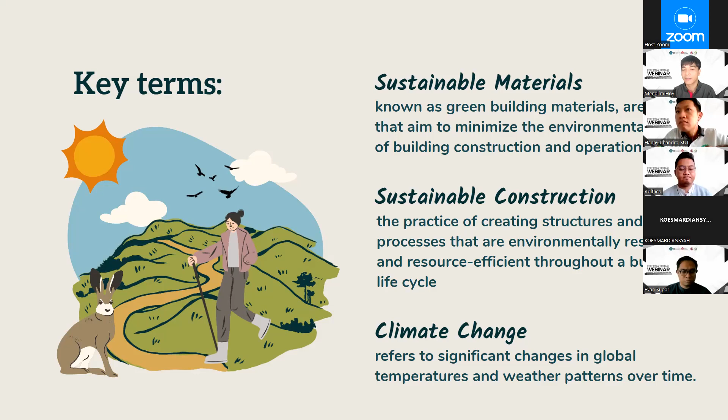So we can go to climate change. What is climate change? Everybody has heard this term very often because it's a global concern.

It can have a lot of definitions if you just Google it, but I prefer a short, simple one: the significant change in global temperature and weather pattern over time, especially in Thailand.

I don't know about your country, but in Thailand we used to have cold weather and hot weather. Right now in Thailand we only have 3 seasons: hot, hotter, and very hot. So the temperature increases every year.

Mr. Hanny stays here, he knows the situation is very hot. The weather changes over time — it can be flooding, it can be storms or whatever, and that is the most influential problem we have to deal with every year.

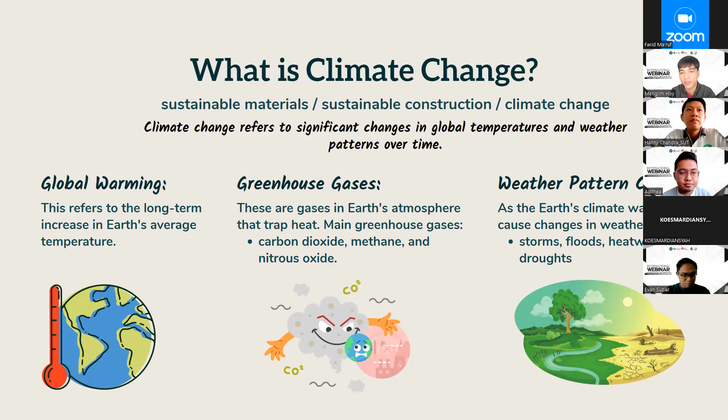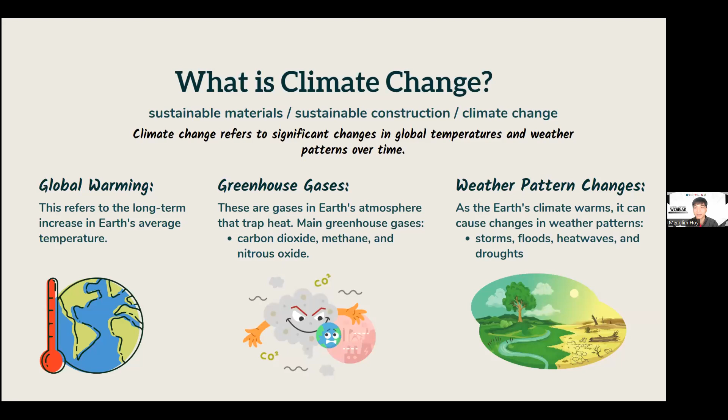Before, it was like every year, for example from January to April, it's hot season with no rain, but sometimes it changes — even in hot weather there can be huge rain or a storm. But in the rainy season, sometimes the rain doesn't come, so it becomes drought, which is very hard for farmers. This is the pattern influenced by climate change.

And another one is sea level rise, which might not affect our country much, but in Europe, for countries that have polar ice, when it melts it can increase the sea level, and this can cause flooding.

And the last concern is about the ecosystem or biodiversity. You can see that a lot of species have gone, and this is related to humans as well. And if the farmer cannot...

All right, so this is all I can say about climate change, which is influenced by human activity. Actually, it can be said that naturally it can happen, but I think humans are the key driver to make it go very fast.

Let's take an example of a case study from climate change, the 5 items I just mentioned above. We have a lot, but I just take some of the obvious examples of the influence from climate change.

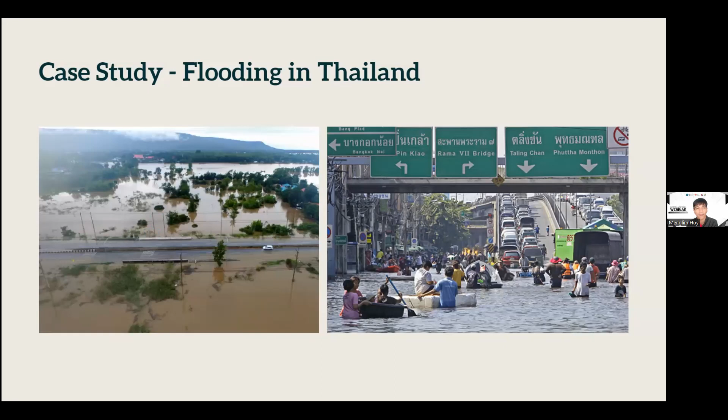And a similar situation is also not only in Thailand, but it also happens in the Philippines. In the Philippines, my friend who just graduated from our Suranaree University, I have some time to talk to them, they are in the Philippines. The problem is quite similar because of the geography of the country, and I think in most countries in Asia, they also experience flooding.

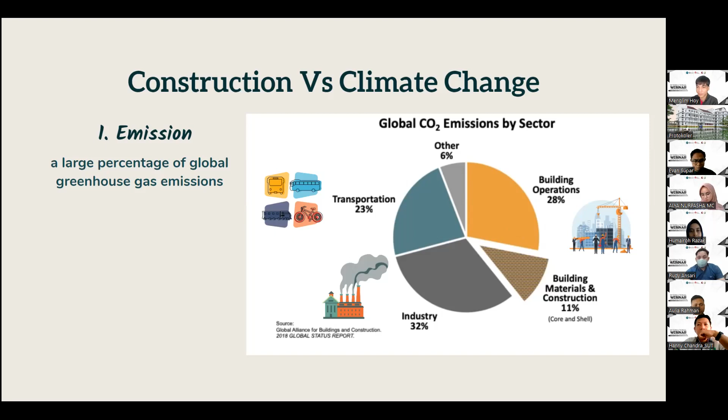But actually, if you combine construction, building operation, and building and construction materials, it's also a main contributor—the big three in producing greenhouse gas emissions. So construction needs to be concerned about the most as well. That is the topic we're going to talk about today.

Number two is resource consumption. Most construction, especially for high-rise buildings or for urban planning development and house development, you can see consumes a lot of natural material—natural material for construction, even for high-rise buildings, road infrastructure, pavement, highways. We consume a lot of natural raw material.

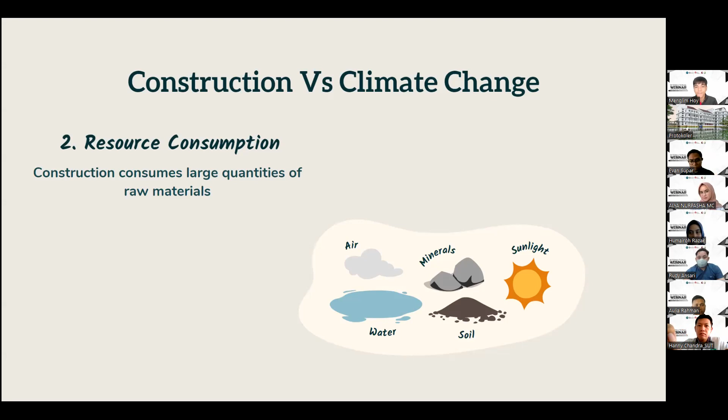And number three is, along with new development of infrastructure, those buildings or infrastructure which is covered will eventually be demolished. Demolish means we have to demolish it first before we construct a new building, because the building might have some age. It's like people—when it reaches its design life, we have to demolish it and then rebuild a new one.

So you can see that the process of demolishing generates greenhouse gas emission activity, and the waste becomes a problem. You have to deal with this waste, not to deposit it in the landfill. Actually, my major now, my research field, I'm working a lot with this waste material in order to convert and recycle it into construction material again.

At the same time, energy use—we need a lot of heating, cooling, and electricity. In Thailand, for example, during hot weather, we need a lot of electricity to cool down the building. So that is a main problem as well for Thailand.

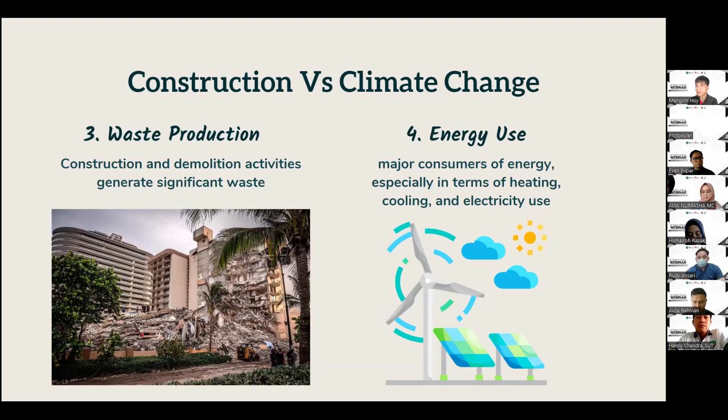And electricity now, the price of electricity has increased. Why? We have a lot of concern—we also have mining that can produce electricity, but mostly the available and main resource is from gas. But during the global situation like Russia and Ukraine, now the problem is the limitation of gas. So the price of electricity has increased significantly. That is the problem for Thailand.

And one more is the urban heat island effect. If you experience or visit Thailand, in the urban area, especially in the city like Bangkok—I think most cities on the globe, maybe in your country as well—in the city, the temperature is always higher than in the province because of the urban heat island effect, which comes from those three things: industrial, transportation, and construction. This makes the temperature and air pollution affect mostly the city.

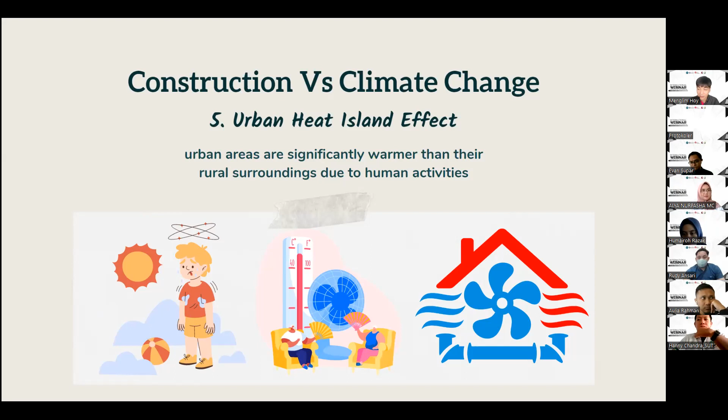So the thing is, how could we have city people concerned about sustainable material and construction? So what is the importance of sustainable construction then?

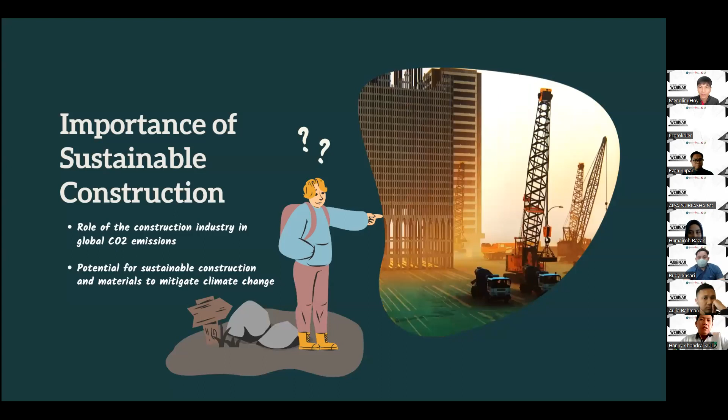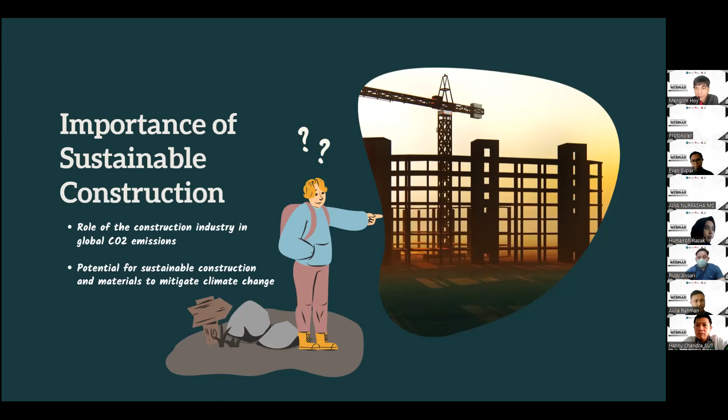For the construction, especially in my works, we need to make sure that not only the construction material, but the construction technique as well. We should adapt and change in order to reduce the greenhouse gas emission or CO2 emission, and try to eliminate the natural raw material, using recycled material instead. This can be one of the things we consider in sustainable construction.

So what about sustainable construction? That brings us to the second key term: sustainable construction material. So what is sustainable material? We have a lot of terms, but the one I'm most experienced with, that I work with a lot in my field, is the first term: renewable.

Renewable means that materials are made from resources that are replenished naturally and rapidly. That is natural, right?

I remember watching a TikTok, I forget which TV program, where they talked a lot about sustainable material. One person said they try to cut down the forest because it's a natural material, claiming this is the environmentally friendly solution compared to making concrete. Another person, the operator, argued with him and put the blame on him, saying that cutting the forest is a big problem - you are trying to vanish the environment, and this is one of the key drivers of climate change.

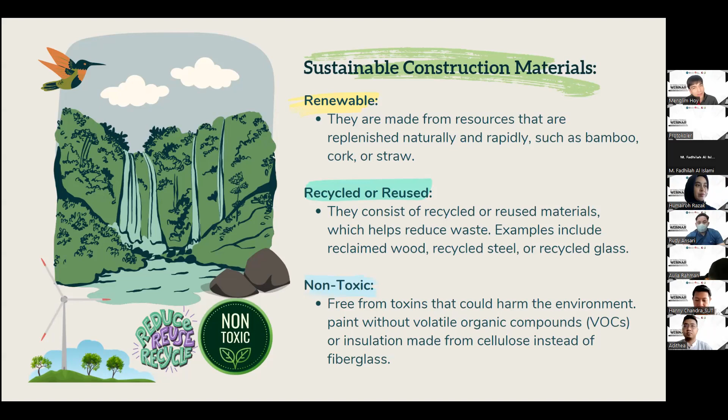Another sustainable material concern might be energy efficiency. Some buildings need certain materials to reduce energy use. For example, you might design the building with more natural light in order to reduce reliance on electricity. Also, when talking about construction material, there's insulation material which can reduce heat from outside, helping cool down the building.

This material area is handled by the expert Mr. Hanny - he worked a lot on energy efficiency. I think he might introduce you to this in more detail.

And another thing is local resources - I mean available resources which can be found at the construction site. I'll take one example: when we build a highway, we need to build a strong foundation, otherwise the road or pavement will fail at a very early age. So those materials have to meet the requirement.

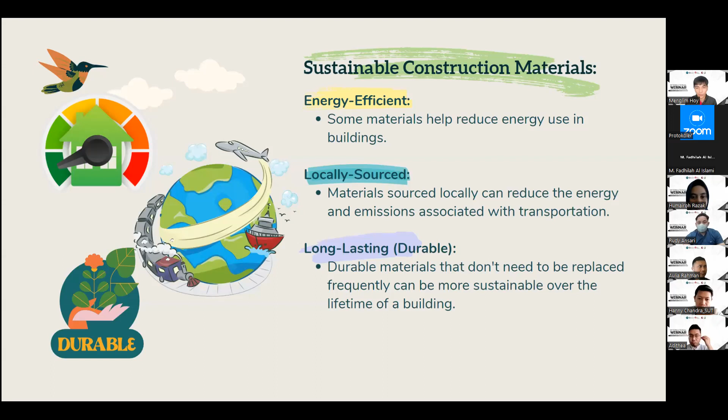Coming back to sustainable construction, these are techniques we might consider, because construction consumes a lot of natural resources. What we try to do is reduce environmental impacts and create healthy spaces, meaning some buildings use technology and traditional ways together. Most architects are expert in this field, for example, designing buildings to get light from the sun for lighting. When you have enough natural light, we don't need electricity, or we can reduce electricity used to produce light.

This is mostly related to sustainable construction. If I have some time, I will explain the construction techniques and what engineers consider when reducing environmental impact or climate change. I think I may need some time, so I will go fast now because time might be running out.

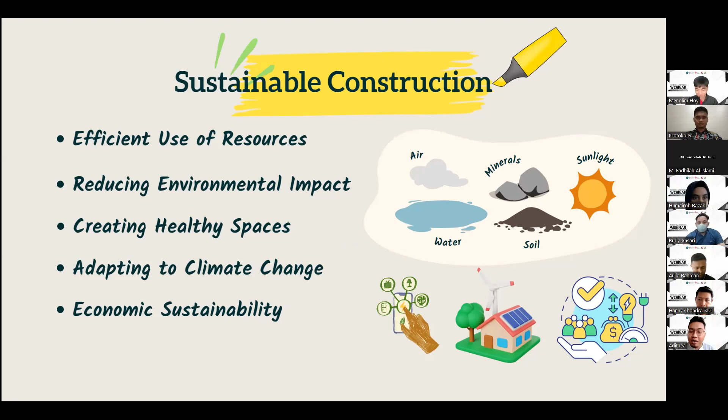For construction material, renewable material - this is one of the projects I got involved with, a university from Austria. The Austrian government cooperated with the Thailand government and our SUT university. Even in Austria, European people don't have this kind of raw material, like bamboo. Bamboo is a renewable material, so this is one case of sustainable material. In European countries, when I talk to them, they don't have this kind of material, but they can adopt and use it for construction.

For this project, we built a guest house in Chiang Rai, near Laos, and I got involved in this one. You can see they used bamboo as the structural member for the building, and they used adobe or brick, or blocks, generated from available local material. They used clay, and material from agriculture waste. Look at this - done with just human activity, without equipment. When we use less equipment, it reduces electricity use and greenhouse gas emissions. So we call this a sustainable diversity project.

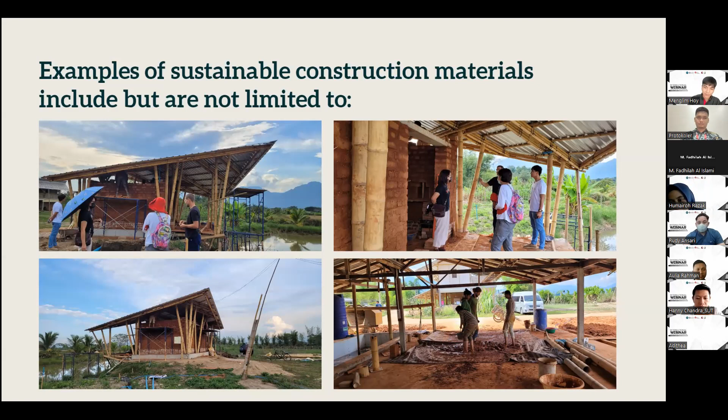One more thing, continuing from that project - I'm going to develop other materials that try to reduce environmental impact, both in Thailand as well. If you remember, I mentioned earlier about PM 2.5, the air pollution in Thailand is very serious, and it's usually from rice field farmers burning the straw, the rice straw. So what happens if we try to reuse this in construction material? We have a lot of research working on this rice straw. They use it as plates and dishes, and successfully developed this material and export a lot to India.

So what if we try to use it as adobe and blocks? We have a lot of patents for using this. You can crush the rice straw, chop it into small particles, or crush it into powder. After that, we try to make bricks without using cement, because cement is one of the most serious problems generating greenhouse gas emissions. So we try to use alternative additives, and we found this material can be used as sustainable brick or wall, which can be used as insulation to protect against heat as well.

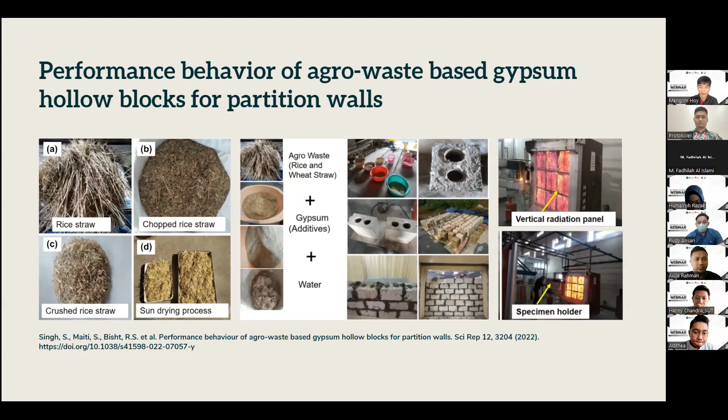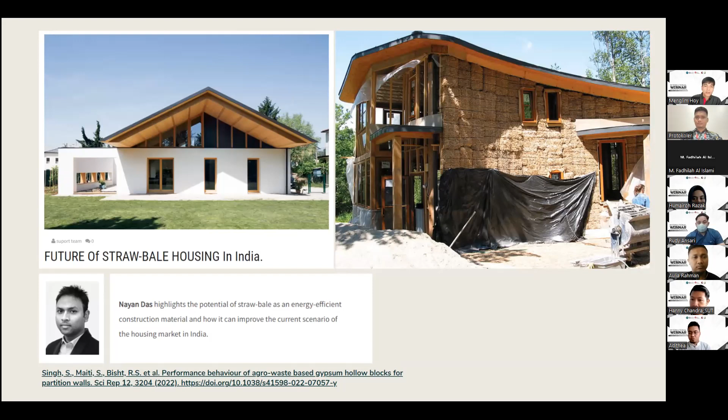But I also work in this field, though with different applications. Because of the hemp, it might not be legal in some countries. In Indonesia it might not be legal yet, because hemp is considered some kind of drug plant. In Thailand it's publicly legal now, but not in general, and it still has some restrictions.

But what I'm going to explain is that this is renewable as well. It's agriculture which can be adopted for use as a construction material. The hemp plant can also consume a lot of CO2.

It can be divided mainly into the stalk. From the stalk you can get the fiber, and you can get the hurd. If you look on the right hand side, we have a lot of kinds of material - it can be fiber, stalk, or hurd.

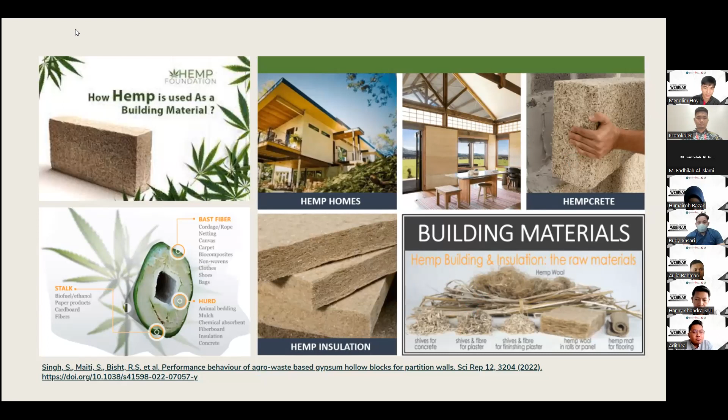So when we come to pavement infrastructure, that is what I'm doing a lot. If you look at the construction of pavement, we have two kinds of road: concrete pavement and asphalt pavement.

The underground foundation is quite similar, but the difference between these two kinds of road is the surface. When the surface is made of concrete, we call it a rigid pavement or concrete pavement. But when the surface is made of asphalt or bitumen, we call it asphalt pavement.

All of this has different layers - it's not only concrete for the whole thing, but we have the foundation. We call it sub-base, base, and surface.

Base and sub-base consume a lot of natural material - crushed rock, limestone, basalt, or granite, all from nature, or sand from the river. This is from the mountain - we have to destroy the mountain.

So what we consider most is trying to replace this with alternative material for use in pavement. Imagine building the highway or road networks - it's very huge, very long. So if we can reuse or recycle waste into this infrastructure, it will benefit both reducing environmental effects and reducing the cost of construction.

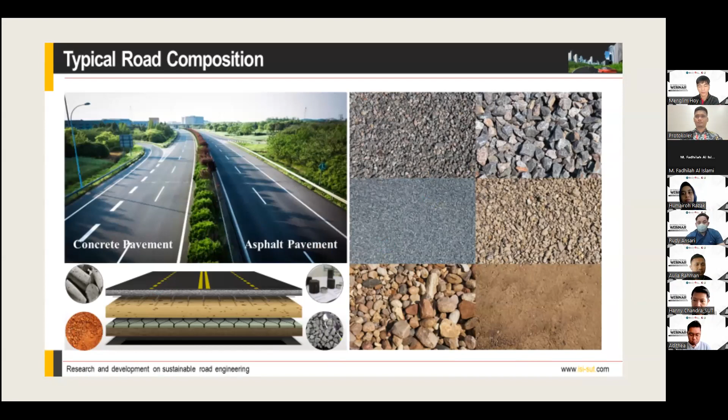So what I have done so far is use materials from industry or from construction. For example, what I call 'RAP' is actually recycled asphalt pavement from existing asphalt itself. When it reaches its design life, after 10 or 50 years, it will be destroyed and become waste.

In Thailand we have a lot of this waste, and we just put it away along the road, never using it. So we try to reduce this by including it into sub-base, base, and surface. We also use RCA, recycled concrete aggregate from buildings, slag from the steel industry, waste glass, and plastics.

PET is now of most concern globally, because plastic takes so long to decompose. So we try to input more PET or plastic waste, as well as crushed bricks and fly ash.

The fly ash - I think we have the same situation. In Thailand, when we mine for electricity generation, we produce a lot of fly ash from mining.

I also had the opportunity to talk to a university in Indonesia, though I forget the name. We would like to develop this into construction material as well, because it can be used as the geopolymer material I mentioned a moment ago. I now work with my PhD student who just graduated and is a lecturer at a university in Vietnam, on fly ash from mining.

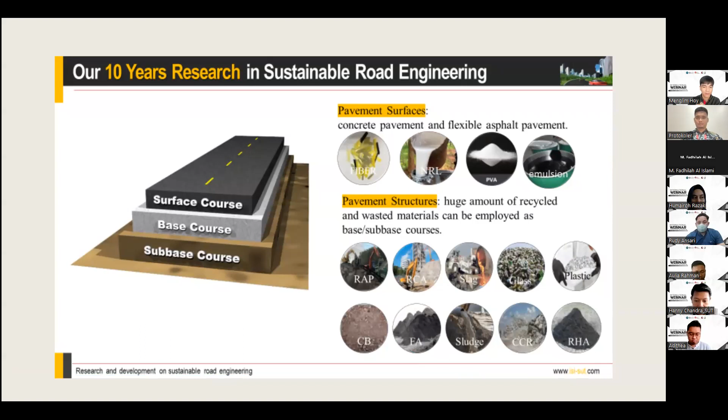We have a lot of mining in Vietnam as well, so we develop together to use as the blocks, a block from the waste as well. Okay, so all of those...

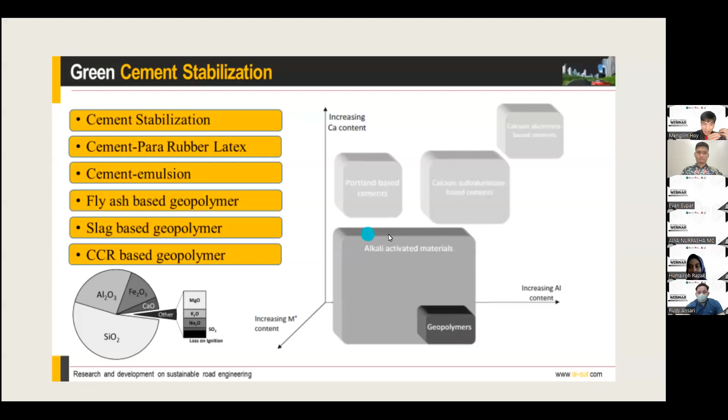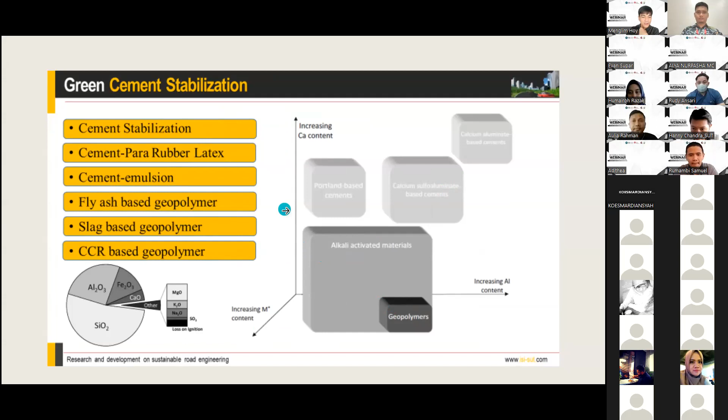Okay, so let's see one of the examples we just worked on. This is recycled aggregate, which is from the building. So we have to crush this and it becomes particles used for concrete material, using cement. Even the cement, we know that the improvement of quality is the cement, but when we have too much cement, your material becomes brittle. I mean brittle, it will be easy to break. Like, for example, if you have a glass bottle and you drop it, it's easy to break because of the brittle material. The cement will generate behavior like this.

So what we're going to do is try to improve this material by using a natural polymer, which is natural rubber latex from rubber plants. So when we include this polymer into the concrete, it can improve the flexibility, or I mean the flexural strength will be increased. So when we improve the ductility of the material, it improves the durability of the material, it can last longer as well. So this is one of the concepts related to sustainable material.

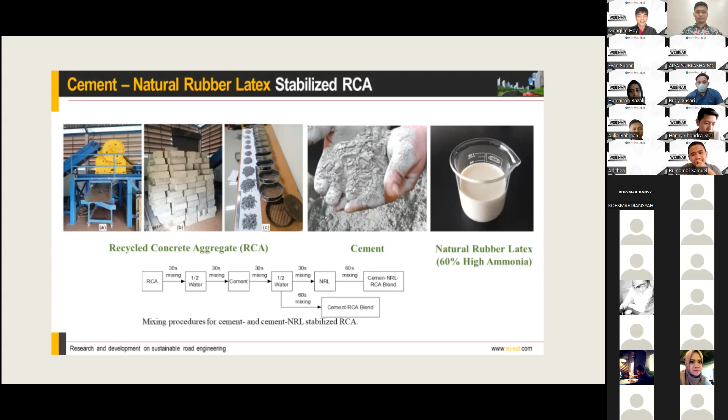All right, and so we did the complete works for the quality of the material. Of course, the mechanical engineering property, we need to make sure that when we reuse it, our method can meet the engineering property.

All right, and another one is the pavement, take one of the examples. It will be exposed to environmental change. Sometimes it rains, sometimes it dries, sometimes it floods, sometimes there's drought. All right, so these are all effects which can reduce the durability of the material.

And when we use recycled material, some from industrial sources, it will have some contaminate material, contaminants like heavy metal material, sorry, heavy metal, it can be leached out from your material, and it can pollute the water resource. So what we're going to do, we need to test it to make sure that those materials will not give an environmental burden. So we do both the durability testing, again the wetting and drying process, and also the leaching test, in order to test that the liquid that is leaching from our material will not affect the environment.

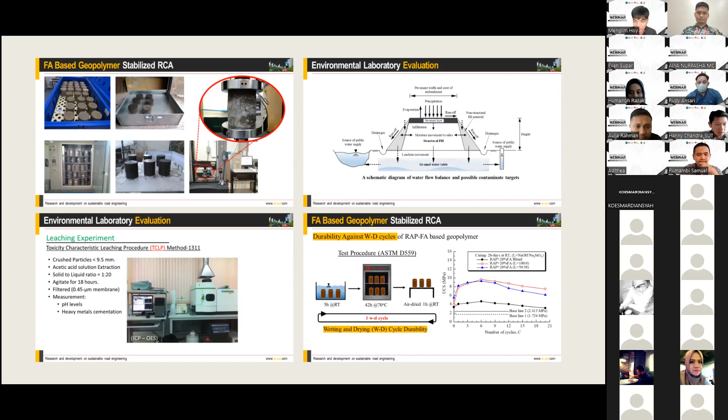That, well, this is the asphalt. We checked that, worked with the Department in Thailand for the asphalt pavement. For the asphalt pavement, we use, what is the component of asphalt pavement? Asphalt pavement is composed of aggregate and bitumen. Bitumen is from petroleum, it's a chemical from petroleum. So when we mix them together it becomes...

Like a strong one, you melt it down. I mean, the bitumen material needs to be melted. The temperature is about 150 to 160 degrees, a high temperature, right? So the mechanical behavior, I need to explain a little bit about the mechanical.

The mechanical property of the pavement or asphalt pavement is the contact between the aggregate. You can look at this: once the pressure of the vehicle comes, it's subject to both compressive strength and flexural strength. All right, so try to imagine if you have the slab of your house, right? It's similar to the slab of the pavement, but it's just longer, and it stays on the ground. So when the vehicle comes, your pavement or slab will be bending, subject to the bending. So the flexural strength will be the most concerning, or the major problem.

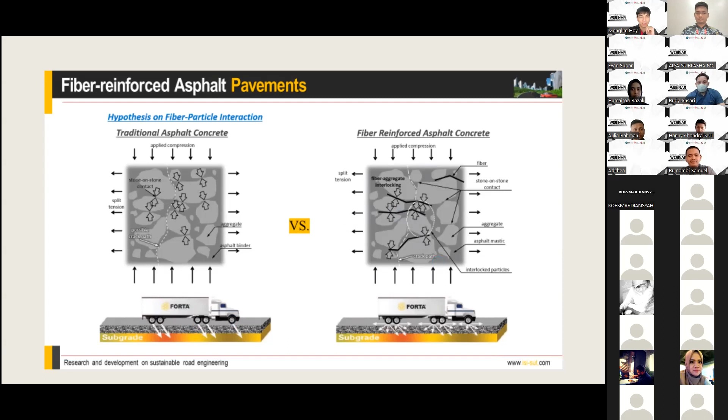And we can, that we did with the Department of Highway, do the trial construction testing. You can see we have different kinds of material.

This is the original AC 6070 asphalt without any improvement. And another one, we use the asphalt pavement with the fiber. And this one is the polymer, the PMA, it's a commercial product, but it's very expensive. It can improve the strength for sure, but the price is very expensive.

So what we're going to do, we made the experiment in the laboratory and also in the field construction, and then we're recording the data. We can observe that...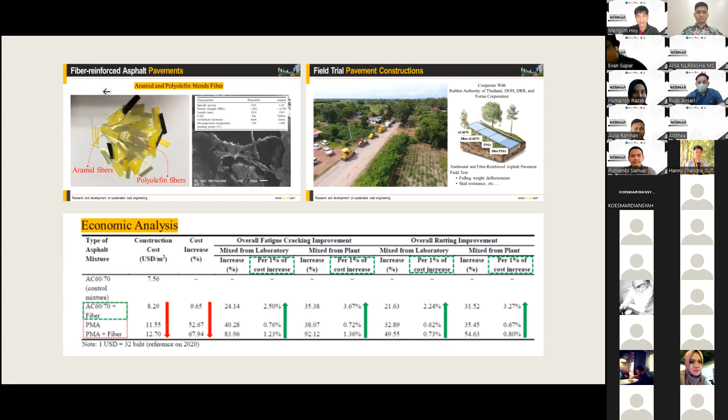So for the challenge of sustainable material, a lot of material can work, but it still has some limitations. It's very challenging how to include those materials, how to increase the amount of the material, because now we can just limit it to about less than 50%, not 100%. This is the challenge for using recycled material.

And lack of awareness - a lot of people might know about climate change, but they don't know how to recycle or reduce this material in the environment. So this is the challenge of the environment.

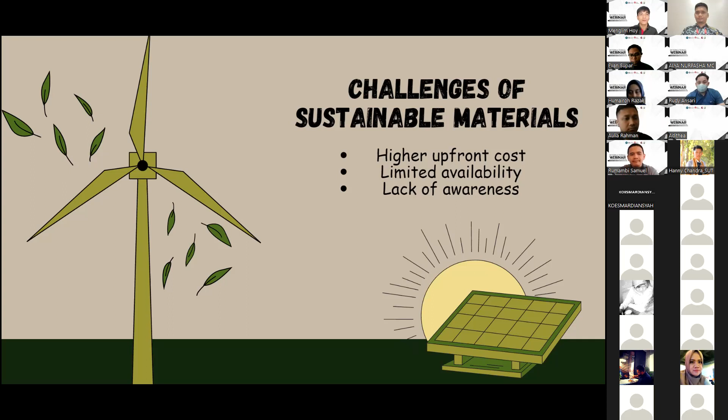So the goal of the action, which is one of the activities that we're doing now, and thank you to your university that organized this activity. So to...

Improve the sustainable construction - when you're doing research or doing your study, you might keep in mind, bear this in mind, that you're choosing sustainable material when you build your house or renovate your house, your building, or other business related to construction. And a company or support those entrepreneurs who try to use recycled material in the construction.

All right, so this is some of our future works. So for the conclusion, now we come to the end, and I think I have more projects, but maybe if we have some time later, we can discuss more.

And that one is for the construction process. For example, the foundation - we use the drilling process using the screw piles rather than using the bored piles or driven piles, and also using the screw piles instead of the conventional piles, but maybe too much for that case study.

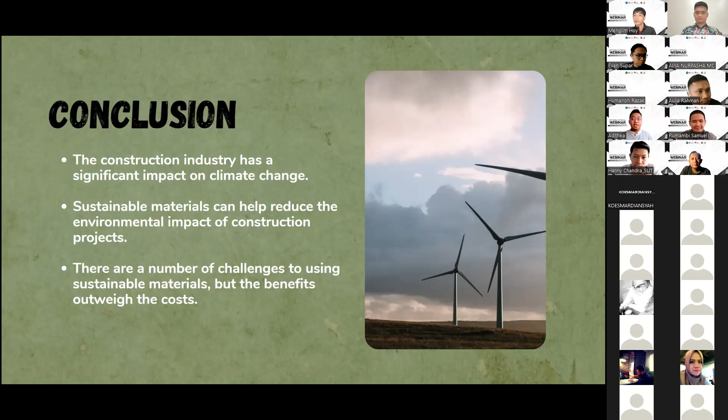But it's worth investing because we can reduce the environmental burden to our global sustainability. So I do appreciate the invitation to share in this session, and thank you for thinking of climate change as we work in engineering and architecture. Hopefully we do this for our next generation.

We have to think, we have to make adaptation to climate change that starts from us for the next generation. Thank you so much, and you can actually find more reference from our research works. You can go to my Scopus research and find a lot of topics related to sustainable construction material. So that is it for my session. Thank you so much.

Thank you very much, Mr. Menglim, that's a very great topic. Towards the adaptations of everything, the behavior from the world of construction, and also our behavior in how we use energy for construction and after construction, with everything. We actually use so much energy that I think it's hard to count.

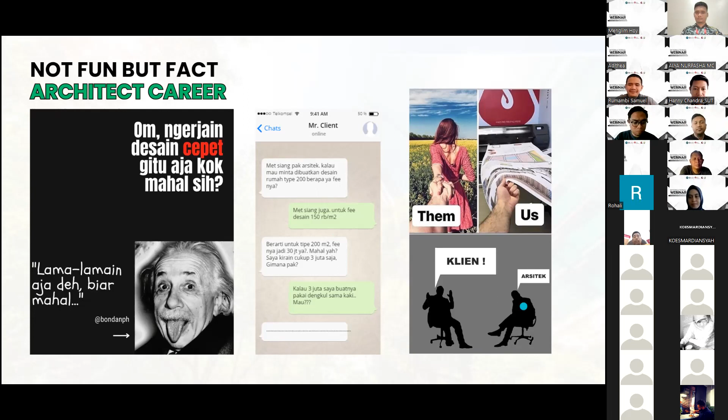For example, what is the difference between architects and drafters? They work in the same field but different roles. Sometimes drafters can grab the projects by giving less cost rather than the architects, right? So we have to stand with the architect's roles. What are the architect's roles?

Architects play a role in determining the sweet spots. Sweet spots, it's like the right spot between the budget balance of the client, aesthetics, and efficiency. But usually we forget about the efficiency - we just put the client's budget and do it aesthetically. But we have to remember again about the efficiency. What is the aspect of efficiency?

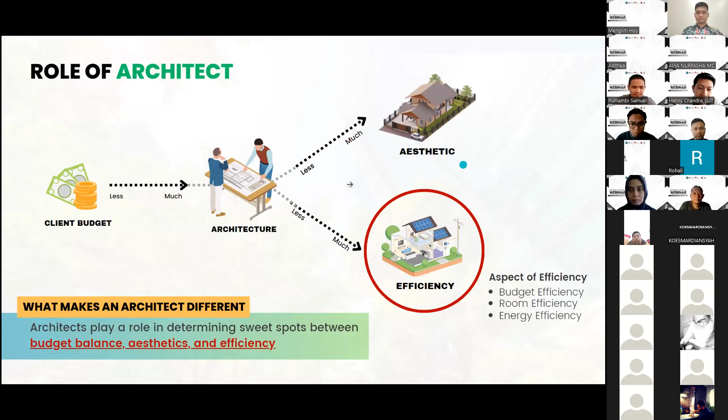Energy efficiency, usually in the architecture field, we name it as green architecture. What is green architecture? It's integrating buildings with the environment in mind by using sustainable sources of energy, designing for efficiency to reduce energy use, and updating existing buildings with new technology. That's the integrated buildings planning.

But there are many designers who claim that their designs are green as a gimmick to sell their design. Sometimes we don't really know what is green, but just put LED lighting and say, yeah, my design is already green.

And clients don't know about green either, so they just say okay, I will pay for it. After they build the design, it's far from expectation. That's usually something we have to be aware of.

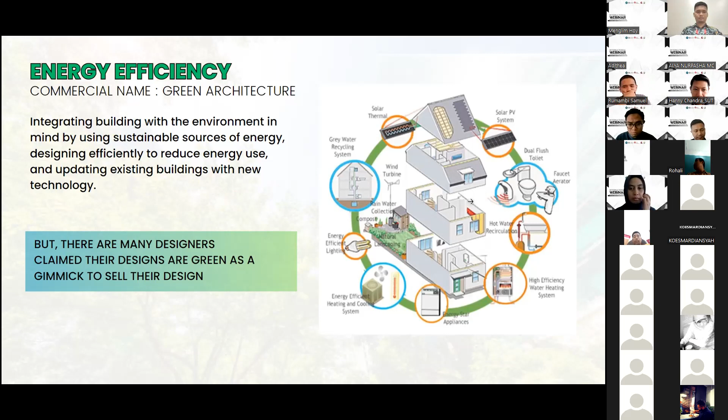Talking about architecture trends in 2023, there are 5 big trends. The first trend is green architecture. That's why there's a lot of carbon emission strategy, and we know the government of Indonesia also has plans.

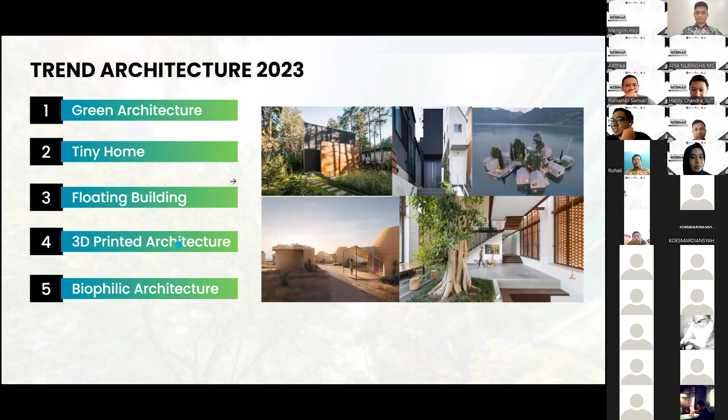For example, how can we know that a building is green architecture? Is it just because the first picture shows wood material, or because it has a high ceiling, or planting a lot of trees, or just putting solar panels, or just having a green rooftop?

Actually, the answer to all this question is it might be green architecture. Yes, maybe all of those are green architecture. But we have to make sure. We have to know what is the basic of green architecture.

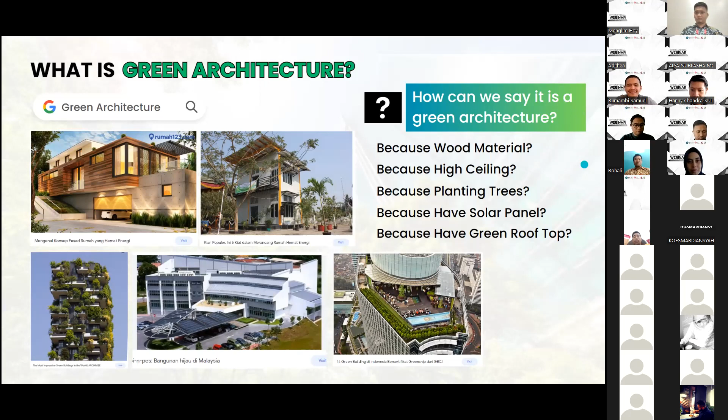How can we know the idea of green architecture? Actually, we have to refer to the standard. The international standard has a lot of standards for green architecture, for example like LEED from the United States. But actually Indonesia also has a standard, the Green Building Council of Indonesia.

It's actually adopted from the international standard, like 80% is the same as the international standards. This is the point of the standard, for example appropriate site development, energy efficiency, water conservation, and others.

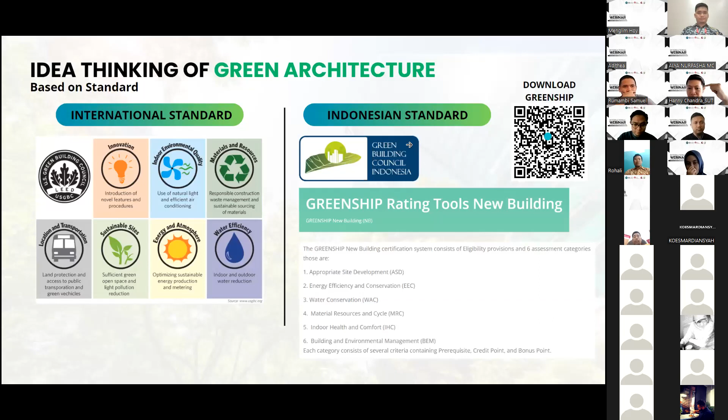We will talk about number 2. But if you're interested to download the GREENSHIP or the requirement for green buildings, you can scan this one and you will get the form from the Green Building Council to assess the green building.

So if we compare apple to apple, actually the international standard and Indonesian standard are very different in terms of the details of the parameters, because the international standard refers to the weather and climate of America. So they have to include heating and cooling, and water heating also.

But in Indonesia, as a tropical climate, they refer to using passive designs like ventilation and natural lighting, which is not mentioned in the international standard because of the different climate, weather, and other factors. So yeah, that's the introduction about the standards.

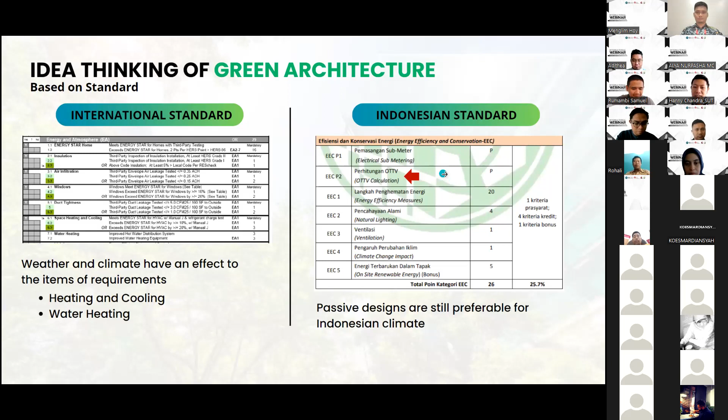We will talk about this one, EECP2, because it has some parameters that talk about the OTTV. What is the OTTV? We will talk about it quickly because I'm not sure I'll have time to describe all of these things, but I will try.

So the way to know that a design is green or not is by using the assessment of the Indonesian standard, and we have to know all of the points, what kind of parameters are used to assess it.

For example, one of the parameters is the OTTV. I'm not sure if you're familiar with OTTV before. OTTV is overall thermal transfer value, or it can be easier if we call it a calculation of the thermal transfer into the facade of the buildings.

This is the formula of the OTTV. It's a lot of formula, but don't think that it's hard. Actually it's very easy because we only have to put in the numbers and then just calculate it. We don't need to calculate all of the things, but we have to put every number in.

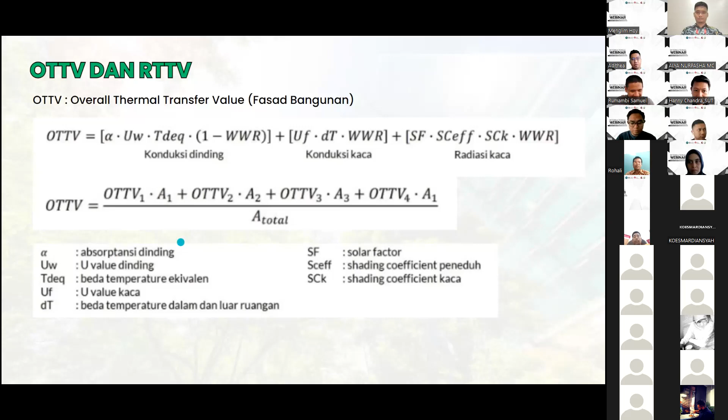So we will try to talk about every unit of the formula, started from the absorptance of the wall, or absorptance. It is affected by the surface and the color of the material. For example, the blacker the glass, the darker the material, the higher the absorptivity.

Right, this is the logical thinking of the materials. For example, black glass or black concrete has high absorptivity. It can absorb the thermal energy easily if the color is dark.

So this is the red one. I will use it for the example later for the calculation. So I just mark it to make it easy.

After that, we talk about the U value of the wall. As we know, the material of the wall can be made from many things, whether not sustainable material or sustainable material, each has a value. For example, this one is bricks, bata merah. Bricks have a thermal conductivity of 0.77. But if we look for concrete blocks or bata ringan putih, that's 0.20. Sorry, bata ringan like bricks has the density, thermal conductivity is about 0.3. This is like concrete, another type of material.

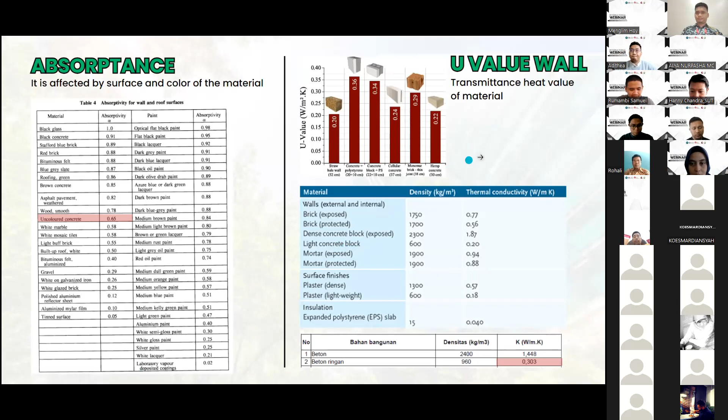Next is the equation here.

It has a different value because of the orientation. For example, the north has a different temperature of about 3 Celsius, and the east has 6 degrees differentiation. For any others, we can refer to these tables.

And WWR is window to wall ratio. This means how large the window is compared to the wall.

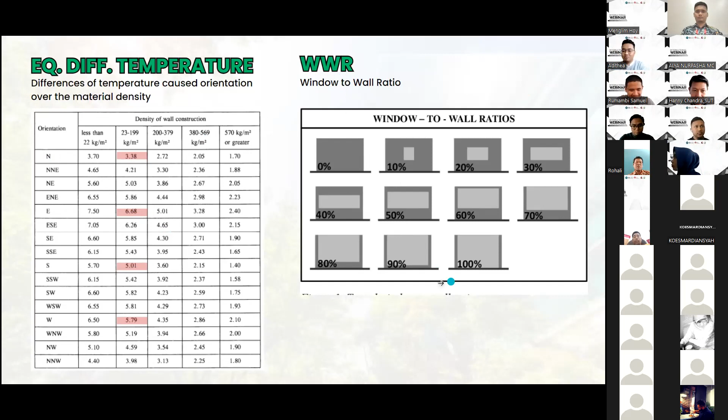Moving to the glass, the U value of the glass also has its value. For example, single glazing, like normal glass, has 5.2 energy loss. As we can imagine, from the lightweight concrete or bricks it's only 0.3, but if we put in glazing, even a small glazing, it can increase the temperature inside because the energy loss is 5.2 watts per square meter Kelvin.

And then we have the other one, the different temperature between outside and inside. The standard of Indonesia, SNI, sets it at 5K differentiation, which is like an average between the whole day condition outside and inside.

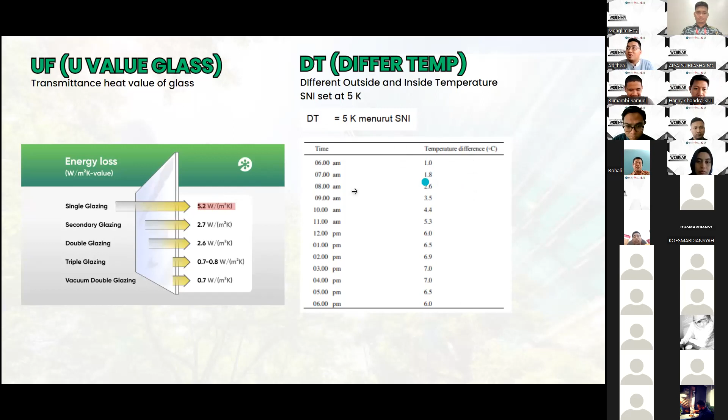And then after that we have the solar factor, which is the intensity of the solar through the window. In every orientation, they have a different value here.

And then we have this coefficient of the glass, the shading coefficient. If the glass is clear, it is higher, but if we put some low-E screen on the glass, it will reduce the shading coefficient.

And then this is the cover coefficient. If they have an overhang to protect the window, it can reduce the solar factor entering the building.

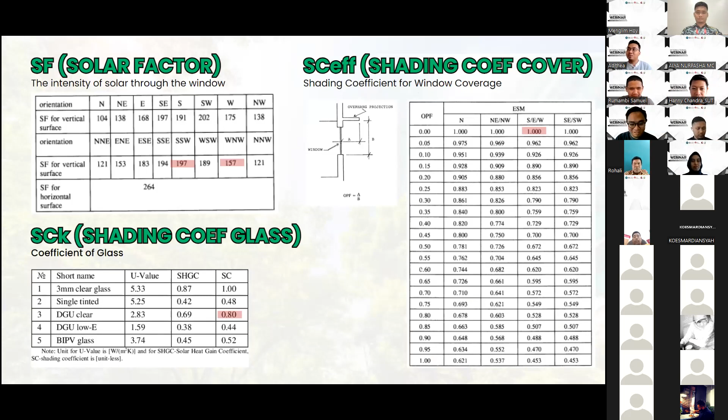So actually it's a lot of data, but we don't need to worry. We can try together using Excel.

I have an Excel you can try to open. If you have time, you can open it and put some values there.

This is the example. I have a 3 by 3 by 3 meter room with 4 square meters of window on the west and south sides. So the question is: how many OTTV if I use the material bata ringan first, and then dense concrete or beton, and then the third one is lightweight concrete, beton ringan.

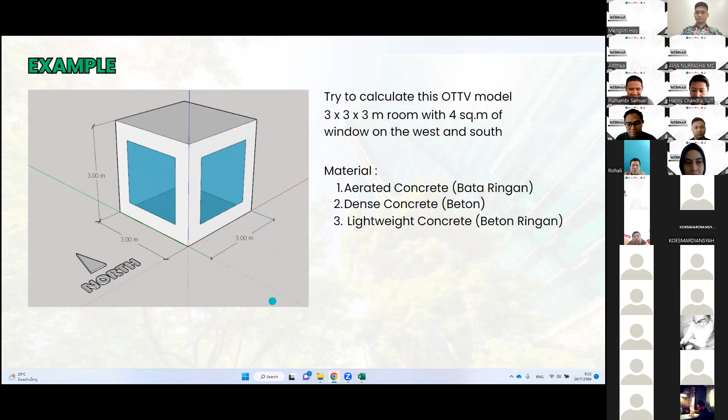So we will open the Excel. I have the calculated one already here, but if you want to try, we can try it together in the mock-up here, because it might be useful for you to assess buildings, like a basic assessment for your buildings.

Even for the OTTV or RTTV, there are many plug-ins to calculate. For example, Energy Plus software, or sometimes we can calculate in Revit, because Revit has a calculation for building energy, or we have a plugin. There's already a released plugin, OTTV, for SketchUp. We can use it.

So we can claim the energy, the green architecture of our building. For example, we have to input the data first of the window wall ratio from the west and the south.

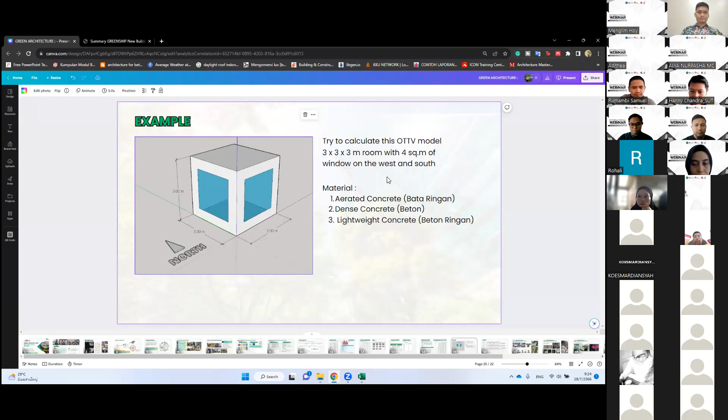Because it's the same value, I just put one of the data here. 2 by 2 windows is equal to 4 square meters, right? So we put this one. This is the Excel calculation, right? We put the 4 square meters divided by the area of the wall.

How many square meters is the area of the wall? 3 by 3 is 9, right? Okay, 9. This is the wall window ratio, 0.4.

Okay, so after that, we have to choose the U value of the aerated concrete or bata ringan. We have to open the bata ringan first. Where is the bata ringan? Bata ringan is 0.303. Put here, this one.

We just calculate this one first, we will skip this for now. We have to know how to calculate every single material first, and area of every side, because this is a simple model, so every side has the same area. 3 by 3 is 9.

Just type 9 here. So after that, we have to put the absorption factors. We have to assume what kind of finished material that you want to put on the buildings. For example, we just...

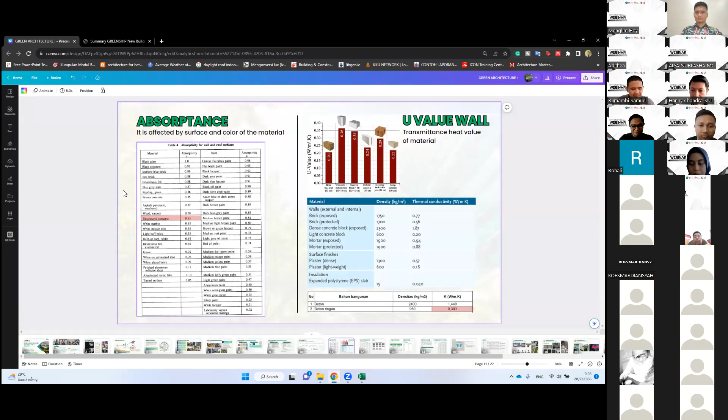color it for all of the sides. So put the beton concrete, sorry, bata ringan - it's a bit confusing, Indonesian and English.

Put the U value of the aerated concrete here, because we will use the same material in every facade, so just put the same number.

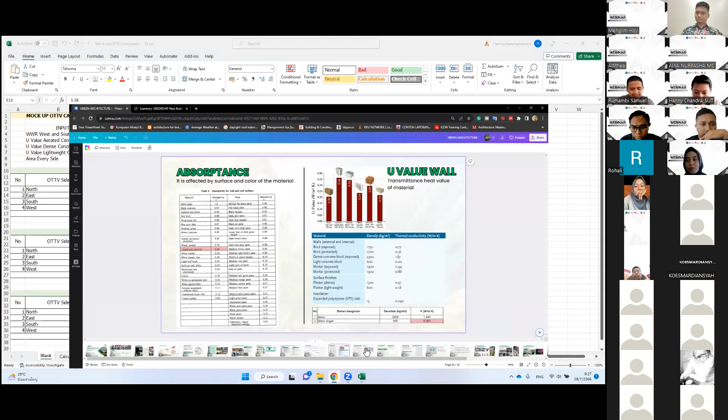I already put this one because it takes time, but you just refer to the differentiation of the temperature here. For example, this is the north. You can open the table of the temperature difference.

This is the north. You have to estimate the weight of the material in square meters. So for the bata ringan, we assume it's about 23 to 200 kilograms per cubic meter. So we put this number into our formula.

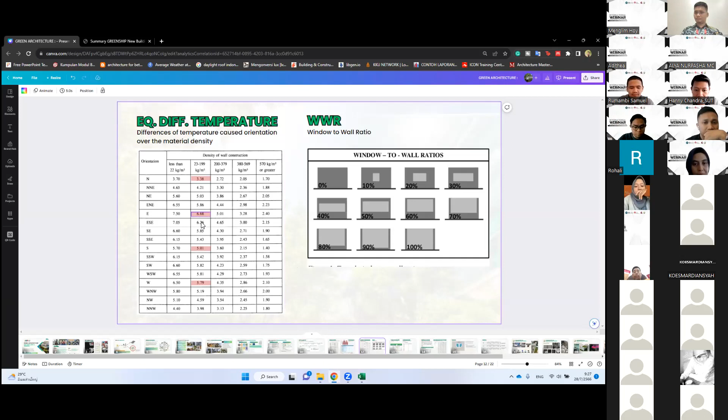For the east, south and west also, just put it into the formula here. Okay, and then after that we put this formula: 1 minus wall window ratio, this one.

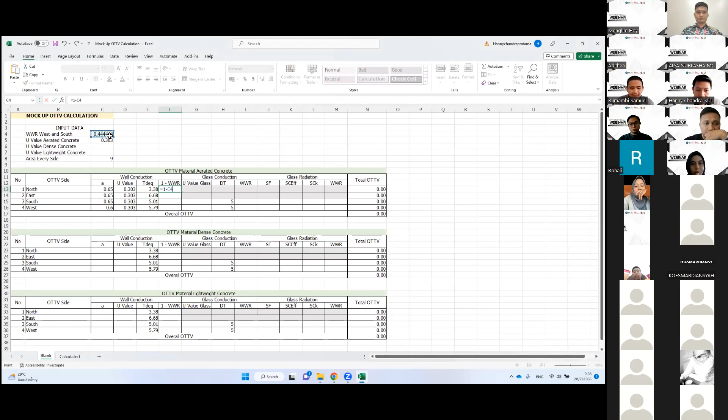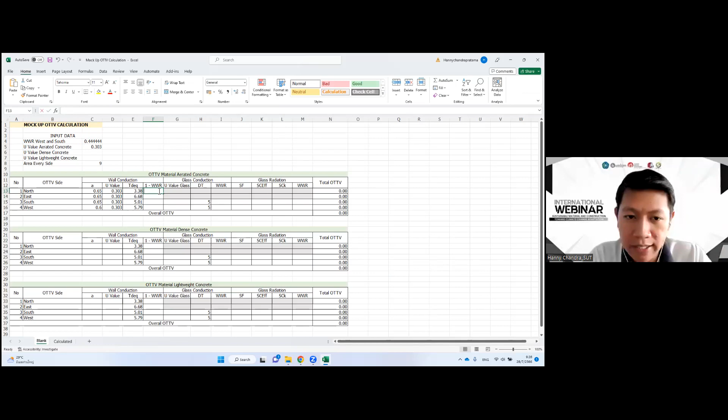Oh sorry, this is 0 because on the north facade they don't have a wall window, but the window exists on the west and south only. So we just put this one minus... for the wall that has no window, we just put number 1, because 1 minus 0 is still 1, so just put it as 1.

So we already have the OTTV for the north facade and the east facade here, because we don't need to calculate the glass conduction and glass radiation. Until here, is there any question?

I hope that you can follow our explanation. Is there any question? No, yeah. Okay, I will continue first.

For the south and west facade, we have to put the value of the glass. We will use ordinary glass, the cheapest one. So that's why if you use the cheapest one for your construction, your building will need more air conditioning. So during the planning of the design, we have to talk with the client and educate them about the effect of every material.

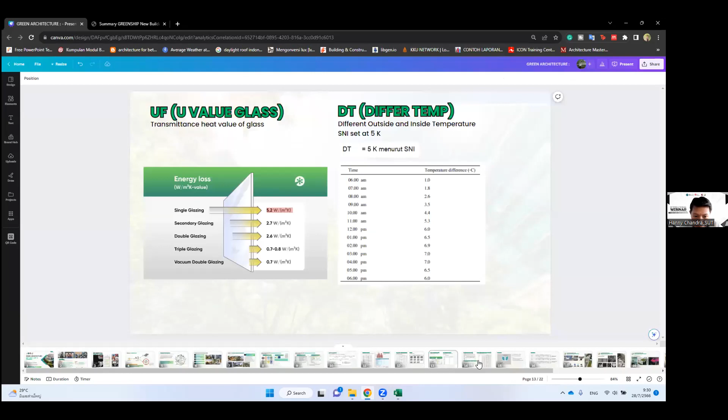If we don't have the coverage, because our example doesn't have shading, overhang shading, so we just estimate 0 shading, which is a 1 coefficient.

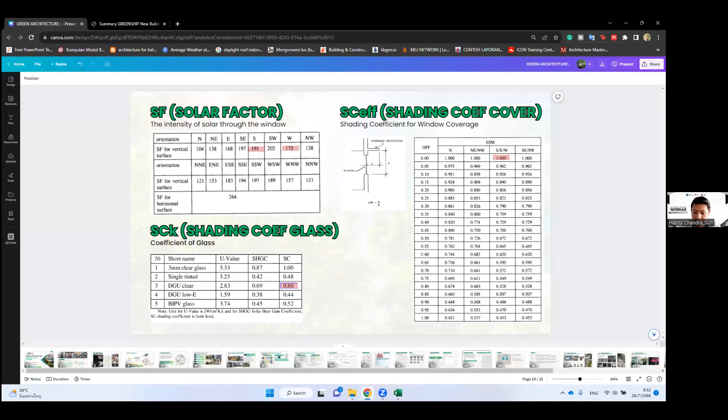And then after that, the coefficient of the glass. For the clear glass, 0.8. Just put 0.8 here, 0.8 here. And then this is the window ratio.

So we have the calculation of the total OTTV for the example building. We use aerated concrete or bata ringan. The total OTTV is 39.09, and the SNI standard is no more than 45 watts per square meter, so it passed the standard.

But for green architecture or the green building council, they have their own ranking standard. The basic one is 45, which is like the silver one. And then, I don't quite remember, but let me guess...

that's usually around 30. Below 30, they will get gold, platinum certification. And if below 25, it's platinum. So that's very, very low OTTV. What is the effect of OTTV?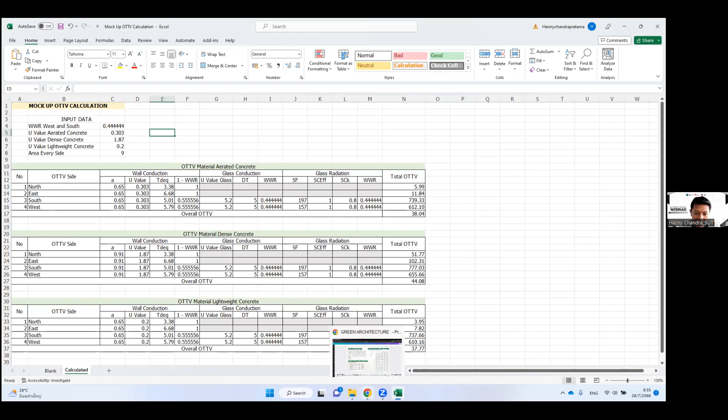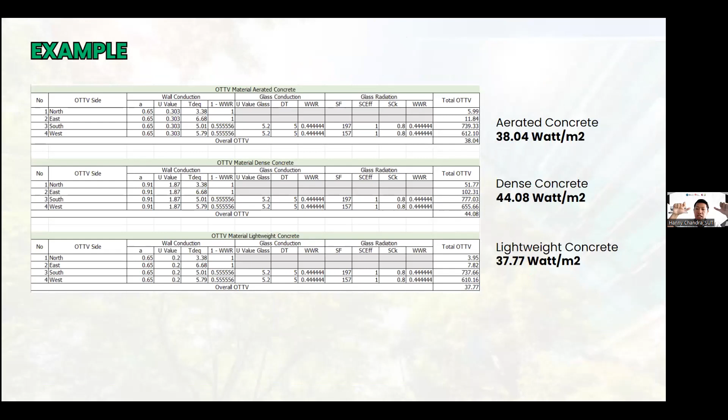I will not calculate all of these examples because we have limited time, but we have the answer here for the differentiation of the 3 materials. This is the result of the calculation for the aerated concrete or lightweight brick, bata ringan: 38.04. If we use dense concrete, konkrit yang ada batunya, like precast concrete, it will take 44.08 watt per square meter.

And if we use lightweight concrete, the OTTV is the lowest one, 37.77 watt per square meter. So from the calculation, we know that if the material uses lightweight concrete or aerated concrete, it makes it more efficient than dense concrete or bata merah bricks, because the U value is different and the absorption is different also.

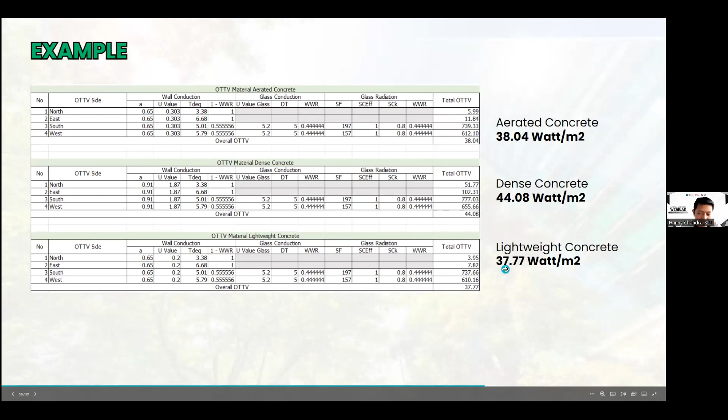I will explain some of our research that I worked on in SIE-CON. Our university has research on material development called lightweight cellular concrete, which at that moment got the lowest OTTV value. That's why our work was interested in developing the lightweight cellular concrete.

What is lightweight cellular concrete? It's actually concrete, but we replace the rocks by using foam. We put the foam inside to make it lighter than normal concrete.

This is the benefit of LCC. It's lighter because normal concrete has a density of 2,400 kilogram per cubic meter, but lightweight cellular concrete starts from 800 kilogram per cubic meter to 1,800 kilogram per cubic meter. It's half lighter than normal concrete. Because it's light, it saves costs for structural design, and also has water resistance, low heat transfer, and sound absorption because it has pores inside.

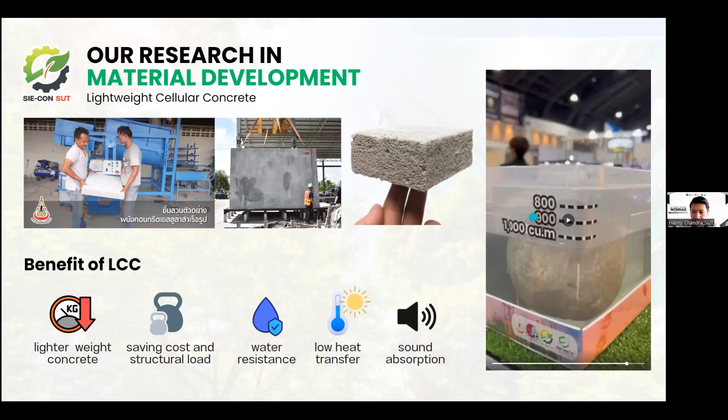As we can see in this short video, this is our testing of the lighter concrete. This is the lightweight brick, this is the light brick here, it's already sunk into the water, but our lightweight cellular concrete still stays on the surface of the water, the circle one. And this is the normal concrete. As we can see, the lightweight cellular concrete still stays on the surface of the water because it's lighter than the other materials.

So why is it lighter? Because we put foam in it. This is the process of mixing the concrete. As we can see, the mortar, semen, is mixed with foam. That's why after it hardens, it has some pores here, some bubbles, for those who cannot see them.

That's the scientific laboratory result. If we see it under the microscope, or we usually call it SEM, it's shown that it has a lot of pores here, and that's why it makes it lighter and gives the other benefits of the properties.

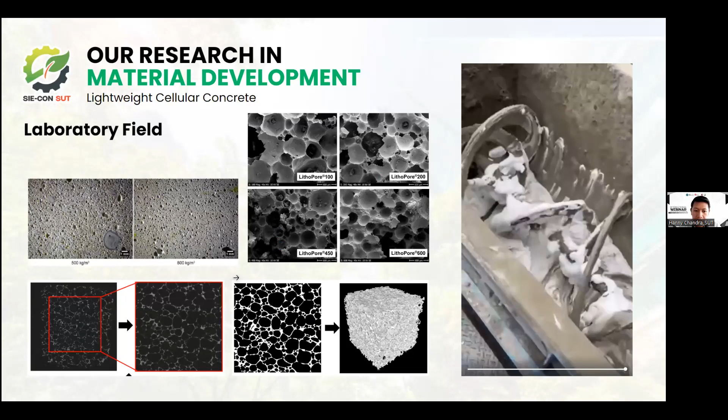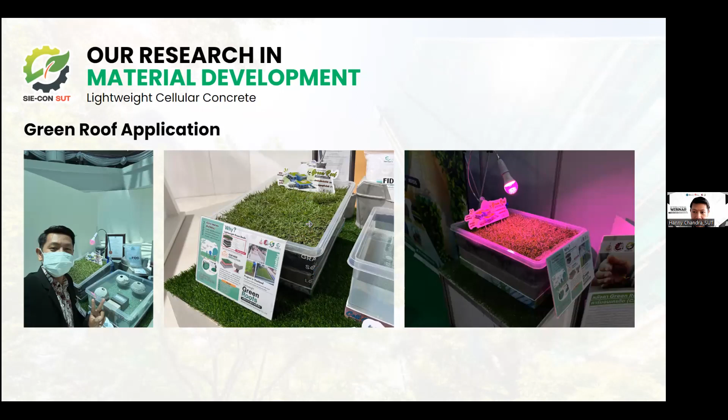For our project, especially my PhD project, I'm interested to use this for the green roof application. As we know, the green roof helps buildings improve their green building rating. So I'm interested to apply this kind of concrete as a green roof. This is the model test of the green roof, where the first layer is the LCC, lightweight cellular concrete, then we put soil and grass, and the performance of the grass is also very high.

Why do I have to replace the green roof by using LCC? Because in markets like Europe or America, green roofs are already popular, but the cost of installation is very high. In Indonesia, it costs about 3 million rupiah per square meter for a green roof.

It's because they have many layers, they have to buy every system to put the grass over the rooftop. But we're interested in a new innovation: replacing all of the layers with LCC as the base of the green roof, and then putting only soil and grass directly on top.

Why can it be like that? Because lightweight cellular concrete actually has good properties to replace all the functions of these layers. For example, I put some samples on the surface of the lightweight cellular concrete. They have pores that can keep water, making the soil stay in good humidity so the grass can still grow. That's why LCC has the potential to replace the old system and be applied to the green roof.

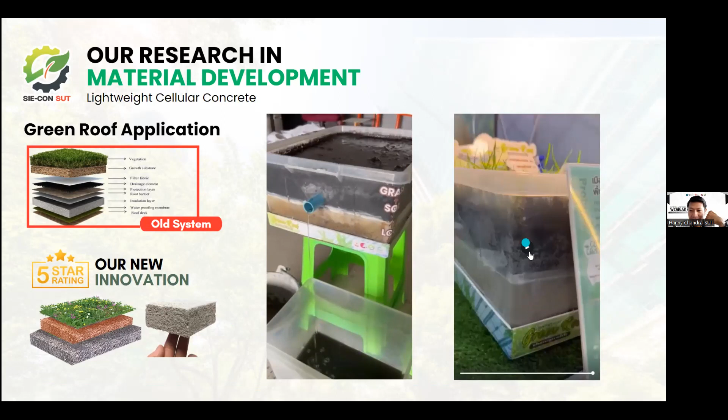This project is also a collaboration with the biggest company for cement construction. Actually SCG also has operations in Indonesia, I think in Jakarta they have the SCG company too.

SIE-CON and SCG are now constructing two variables of green roof, where LCC is our system, and EPS foam is actually a system from Germany. Next week we will test the performance of LCC versus EPS, like Thailand versus Germany, to see who wins, and then SCG will make it their new product to sell to the market.

That's something I can share. If you have a question, feel free to ask. And if you're interested in this topic or want a scholarship to study for master's or PhD, you can contact me or Ajahn Lim, because we offer scholarships for students interested in sustainability. Okay, thank you.